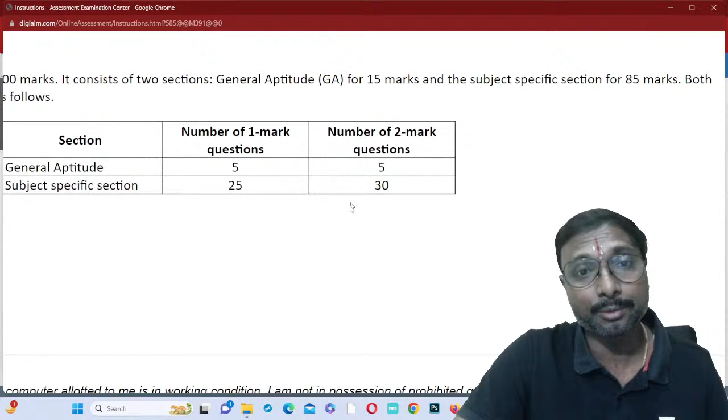If it's not visible, I am zooming it in. General aptitude has 5 one-mark questions and 5 two-mark questions, totaling 15 marks, because 5 into 2 is 10, plus 5 into 1 is 5. So 15 marks total for general aptitude.

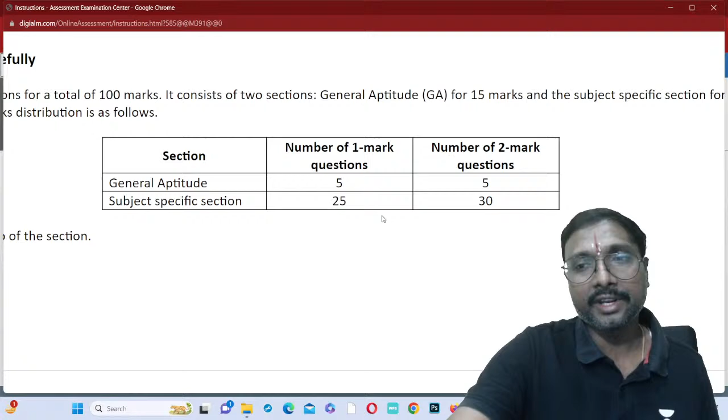Remaining, this is 30 into 2, how much is that? 60. 30 into 2 is 60 marks, plus 25, how much is that? 85. 85 plus 15, how many marks? Total 100 marks, yes or no?

That's covered, so you go for this. This is the splitting. You can declare by clicking on the declaration by the candidate, 'I am ready to begin.' You begin this, and you will be redirected to the test.

If you want to look at the general aptitude, you click on general aptitude. If you want to go to the civil engineering paper, you click on CE civil engineering paper. Got it now? Is it clear, everyone?

So whenever it is a numerical answer type question, here's an example in mathematics: a horizontal curve, radius of the curve obtained as 300 meters, with the design speed as 15 meters per second. This is a transportation question, a geometric design question. If you remember, horizontal curve, horizontal alignment — the radius of curve is 300 meters, design speed is 15 meters per second, with allowable jerk given.

What is the meaning of jerk? Jerk is nothing but the rate of change of centrifugal acceleration. The minimum length of the transition curve is L equals V cube by CR. Do you remember that formula? We have to use it. C or J is nothing but 0.75.

Radius is 300, right? Speed is 15 meters per second, right? So L is equal to V cube by CR. Do you remember that formula? C is given, V is given, R is given.

Directly like that, if you are calculating this, what will you do? V cube by CR, how much will you get? 15 cube divided by 0.75 into... yes, jerk is rate of change of acceleration. So I've calculated it now, if you observe, you will get this value.

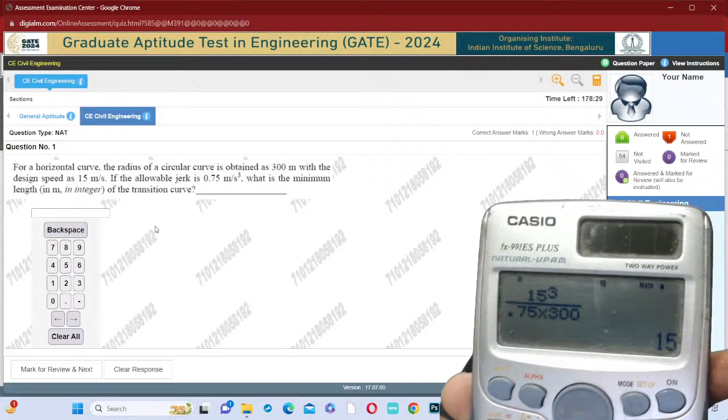This is 15 meters, so what do you do? You enter 15 like this, 1 and 5. You enter like this and press continue. Okay, like that you will move on to the next question.

So here, if you observe at the top right, what happens? You can see the green color showing answered questions — whether you answered correctly or not doesn't matter, but you have answered, so it's green. Not answered questions show thumbs down or red color — that means not answered questions.

How much time is left shows at the top. A virtual calculator is also available at the top if any calculation is needed. We mentioned V cube by CR. V cube is 15 cube, yes? You press the function, 15 cube, then divide it by C.

0.75 we are getting, right? V cube by C divided by R, what is that radius given? 300, right? Like that you try to use it, and how much will you be getting the answer? 15 you are getting here, right everyone?

Is the calculator visible? Whatever operations I am doing, right, 15 you are getting, you enter that 15 there. At the right top you will be finding this calculator, that is why you have to access this calculator.

So this one also, what is it given? That is basic level question only, no? So horizontal curve, is it an in-depth question, or is it a direct formula based question, you can say? That is a direct formula based question given, na? Is it not like that?

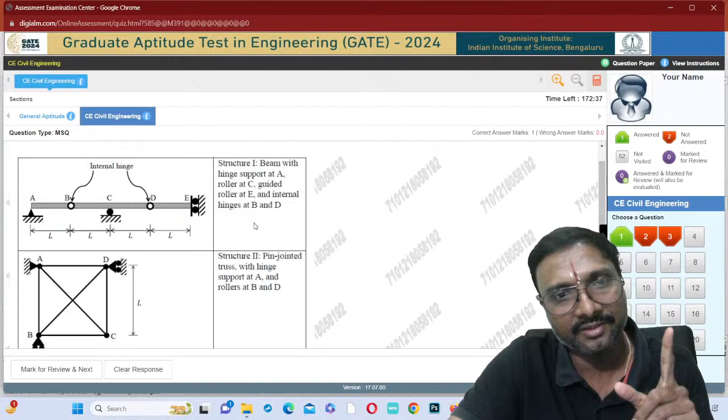Structure 2, what is that you can say? Pin jointed truss with hinge supported at A, B and D. At A, B and D, what is that you can say - hinge supports? Is it true? No. Why? At this B and this D, if you just observe, are those hinge supports or roller supports? Those are roller supports. So that is false.

Structure 3, pin jointed truss with hinge supported at A and roller at C. Hinge supported A and roller at C - that is correct only, no? 3 is correct, right? Here if you just observe, yeah, 3 is correct now.

If you just observe, the question type is MSQ, which means more than one answer can be correct. So structure 1 is correct and structure 3 is correct. So structure 1 you tick it. Is structure 1 unstable or not? Structure 1 is unstable. Is it so? Yes, absolutely it is unstable.

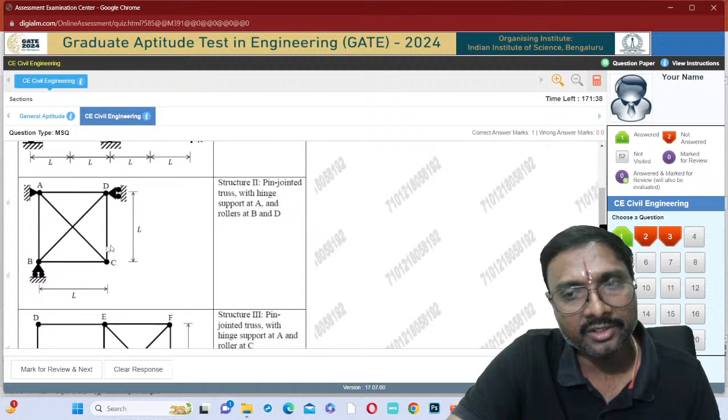Structure 2, what is that you can say? Structure 2 is also unstable. Yes, this entire structure can move in the downward direction - unstable. Structure 3 is also unstable. So all structures are unstable - it is not that all structures are stable. So A, B, C, you have to answer like this.

And what is that you need to go for? Save and go to the next - at the bottom you will be having that save and go to the next button. Click on this, then you will be going on to the next one.

So this is which one - RCC question, is that not so? So structural analysis - previous question it was structural analysis question mark 1, is that not so? That is also structural analysis mark 1, no?

Now this one, sixth question. The cross section of a girder is shown in the figure, not to scale. The section is symmetric about the vertical axis YY. The moment of inertia of the section about the horizontal axis passing through the centroid is - what is it you can say? You are asked to identify the moment of inertia. First we need to find the centroidal location, then apply the parallel axis theorem.

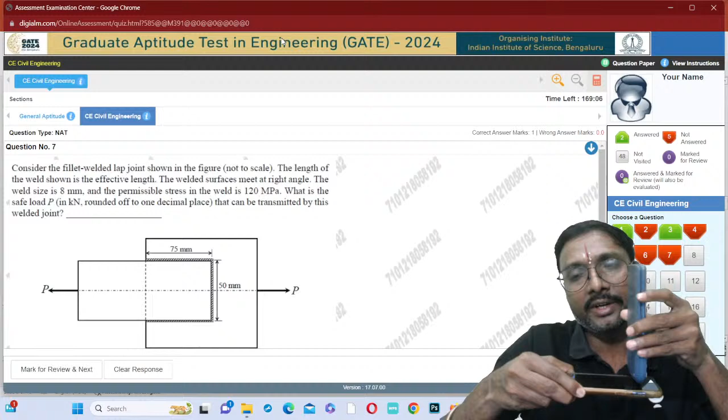So since it is 90, we have to take Ks equal to 0.7. 0.7 times the size of the weld, that we have to take.

If the welded surfaces meet at right angles, the size of the weld is given as 8 millimeters. So throat thickness equals 0.7 times 8. The permissible stress in the weld means, is it working stress method or limit state method?

It is working stress method, you have to be careful. What is the safe load? You can say simply permissible stress into area. What is that area? Area is nothing but the effective length of the weld into the throat thickness. Effective length of weld into throat thickness into permissible stress gives the safe load.

So 120 into 0.7 into 8 into what is the length of weld? 75 plus 75 plus 50. 75 plus 75 is 150, plus 50 is 200.

One second, I will be moving this. So what is that you will be having? The length of this weld is 200. Length of this weld is 200 into what is the effective length?

You can say 0.7, K is 0.7. So 0.7 into the size of the weld, which is given as 8. Into the stress, which is given as 120 MPa.

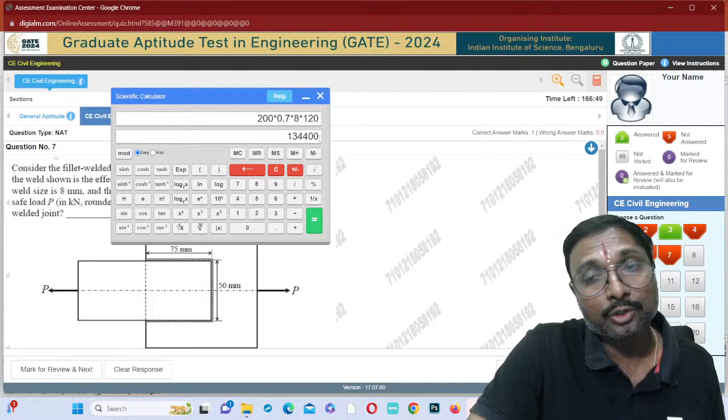0.7, because it's 90 degrees, into 8 as the size, into 120 as the stress. So press equal. What is that you'll be getting? 134,400. So if you want this in kilonewton, how much will it be? 134.4 kilonewton.

134.4, it is given in kilonewton, so you have to enter 134.4 like this. If you are having any doubt, then you mark for review and go for next. If you are not having any doubt, you just go for save and next.

Suppose I wanted to see this again, then you go to the next. Here if you observe, on the right side, answered is shown in green color, that is 2, not answered is 5. Not visited is 48, marked for review in purple color is 0. So if you wanted to check it later, you can mark it for review.

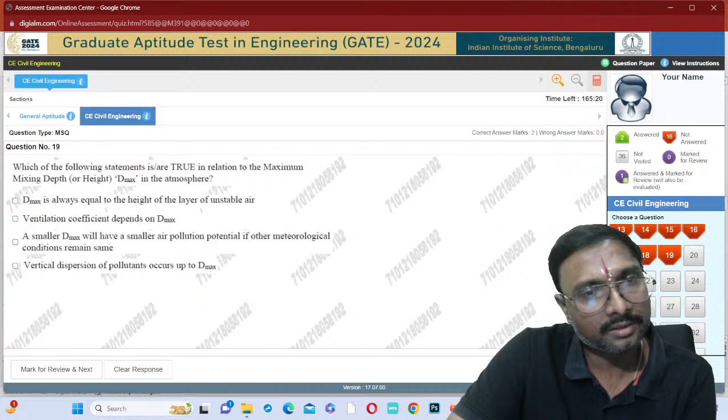This is mathematics only, you can get this eigenvalue question. We are not going into this. This is soil only, we don't go for this. This is also mathematics. This is also soil only. This is also mathematics, these functions, very small questions they are giving actually. This is also a very basic question, we don't go onto this. This is also mathematics only. This is also environmental. This is also fluid, water related. Greenhouse gas, that is also not our subject.

Now if you just observe, this is our one, you can say, right? Tell me which of the following options match. So this is a 2 marks question. Bitumen and transportation, 2 marks question, it is given.

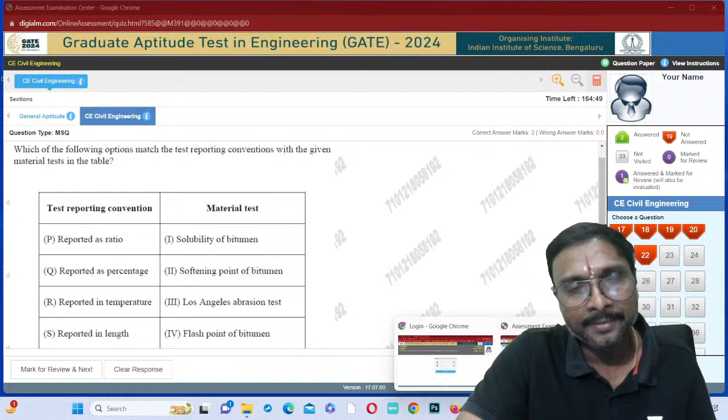Transportation already 1 mark given, and this is your 2 marks question, theory question, right? First question was very basic direct substitution. Second one is theory question only, it is given if you just observe it. Now what is that? Reported as ratio, reported as percentage, reported as temperature, reported in length.

Which one? Solubility of bitumen, softening point of bitumen, Los Angeles abrasion test, flash point of bitumen, ductility of bitumen, specific gravity of bitumen, thin film oven test. Which one you can say? Which one is reported as the ratio? Los Angeles abrasion test, solubility of bitumen, softening point of bitumen.

Softening point of bitumen means temperature. R2 is matching rate, you can say it. R2, how many options are there? First option and this third option only will be there. R2, next, what is it you can say?

Reported in length, right? What is it? Yes, ductility of bitumen, S5, R2, S5. R2 and S5, which option? This option only, you need not check all. Even without checking also, directly you can select it, yes or no, if you are checking to. Then you save and go to the next.

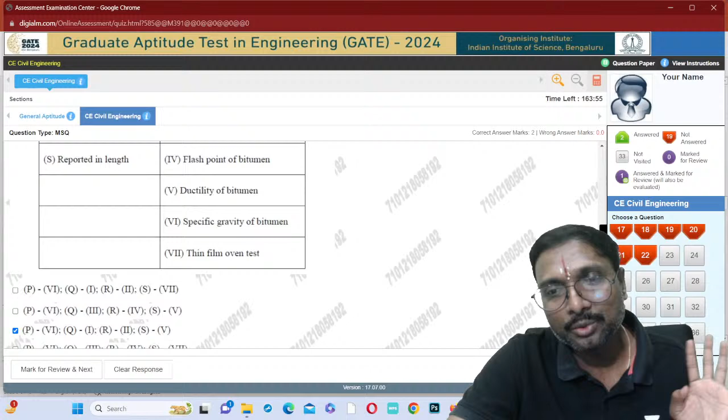Like that. So this is also wastewater, not ours. This is also soil. Yeah, it is RCC, just observe. A singly reinforced, it is a 1 mark question.

Singly reinforced concrete beam of balanced section is made up of M20 concrete. The grade of concrete is given as M20, and Fe415 grade steel is given. Magnitude of the maximum compressive strain in the concrete and the tensile strain in the bar at ultimate state under this flexure is, round off to 4 decimal places.

So it is very basic question. So what is that? In case of this flexure, ultimate state under flexure, right? Under this flexure, what is that? You can say 0.0035, it will take. And what is that? You can say you have to calculate which one.

This is strain, right? Strain in the steel, you have to check it. Do you remember that? How to check it? Very basic question it is. Strain variation is linear in the...

Always, right? Plane sections before bending will remain plane after bending. From that assumption, strain variation you take it as linear. So do you remember that, everyone? That is how you will be getting it from there. Okay, you just go to our classes and you will be getting everything.

So you can select one answer, mostly this one will come. I will just, we are selecting and you go for this. 1 mark, that is RCC given for this 1 mark. RCC is given for which one? This 1 mark, you can say, just for an example.

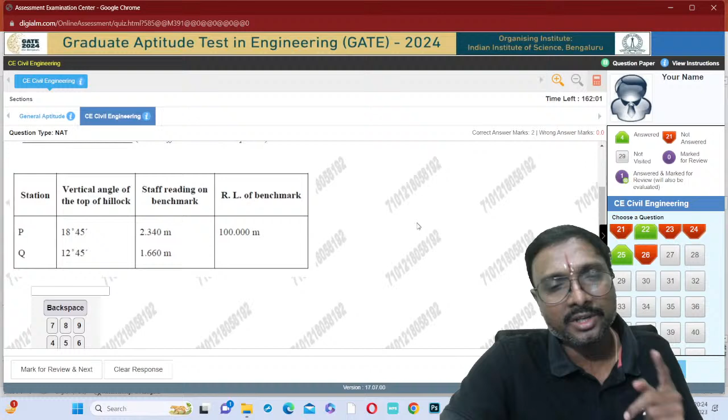Same vertical plane, trigonometric one. So two angles of elevation are only given. So from station 1, station 2, and RL of the top of this hillock, same vertical plane. They are in the same vertical plane means one behind the other, you can say.

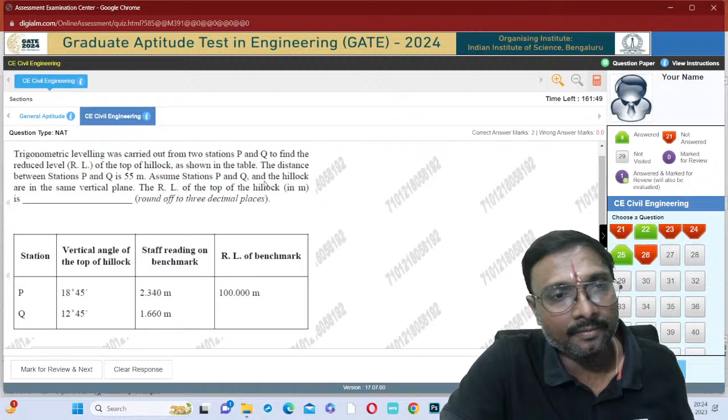You will be having, right? So it will be easy to get this only. So now tell me, station P will be nearby or station Q will be nearby? Which one you can say? Station P you are having higher angle means nearby.

Station Q lesser angle means it is behind. So station P is near to the hill, station Q is away from the hill. Very first case you are having. This is also simple basic question only. There is no twisting in this.

Surveying, how much they have given? 2 marks they have given. This is your survey, they have given which one? This 2 marks plus, you can say. And if you observe the other things, yeah, this is which one?

This is also a geotechnical question only.

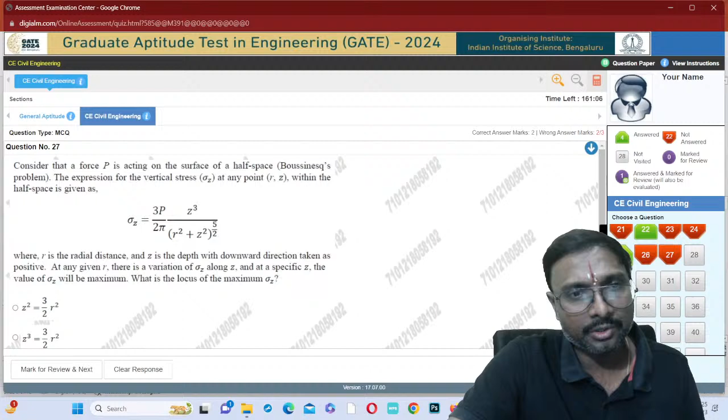This is different, not our subject. This is also not our subject. Yeah, this one, if you just observe, what you can understand from this question is a transportation question, 2 marks.

The plot of speed-density relationship is linear. Speed versus density relationship, vertical axis speed, horizontal axis density. The two roads shown in the figure - capacity of road A is CA, capacity of road B is CB, then what is CA by CB?

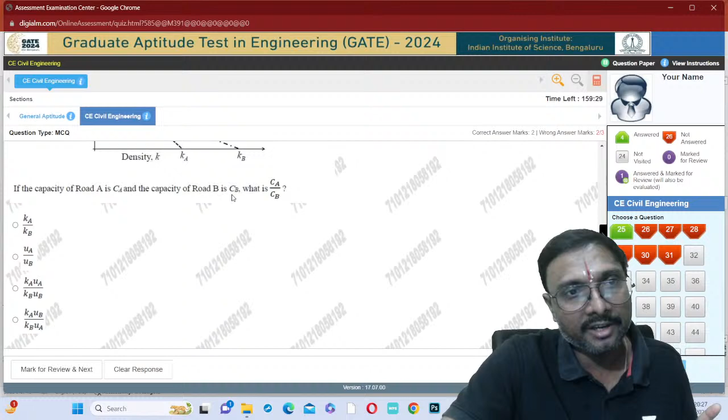CA by CB is nothing but which one? Capacity is nothing but VF by 2, is it or no? That is the capacity of road A, if you just observe - Kj by 2 into jam density of road A, into the free flow speed of road A.

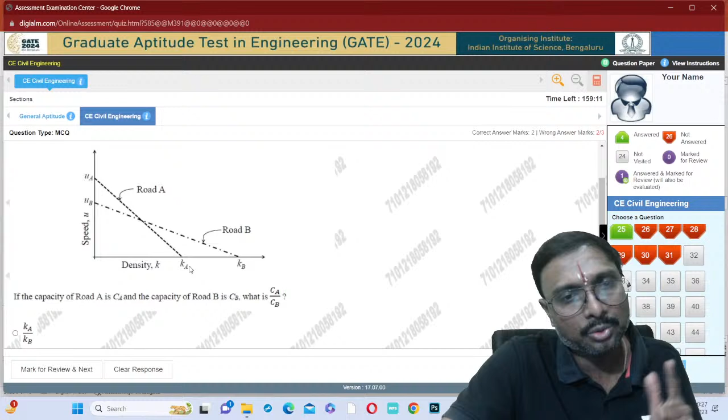So that is Ua into Ka by 2, and this one Ub into Kb by 2. So that gives Ua Ka by Ub Kb. Ua Ka by Ub Kb is which one? This one, option C.

Direct basic question only they have given. So this should not be given for 2 marks actually, this should be given for 1 mark only. So transportation, how many marks? 2 more extra marks, like that you are having now. Got it?

So here plastic section modulus by elastic section modulus we have to go for, you have to be careful. So this is given for 2 marks, steel. This is also a basic question only. Steel, they have given - where is that steel, you can say.

Yeah, steel previously also they have given one question. I did not write this. Steel 2 marks they have given. Previously one more question was there, we missed one question you can say. Where has it gone...

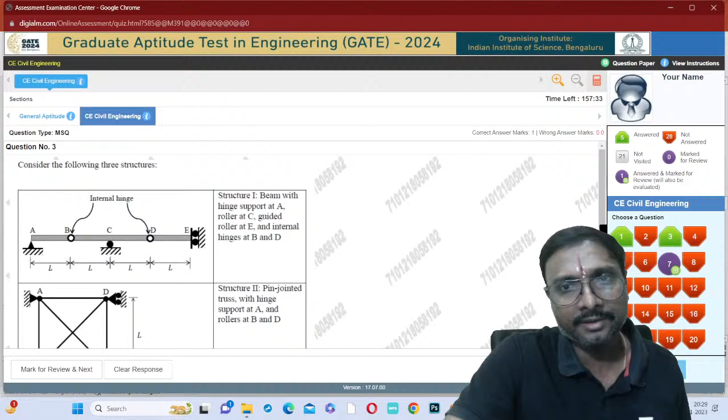So this is transportation, 1 mark given. This is which one? This is structural analysis, 2 marks given. This is also structural analysis, one more mark we have written - 2 plus 1, 3 marks we have written.

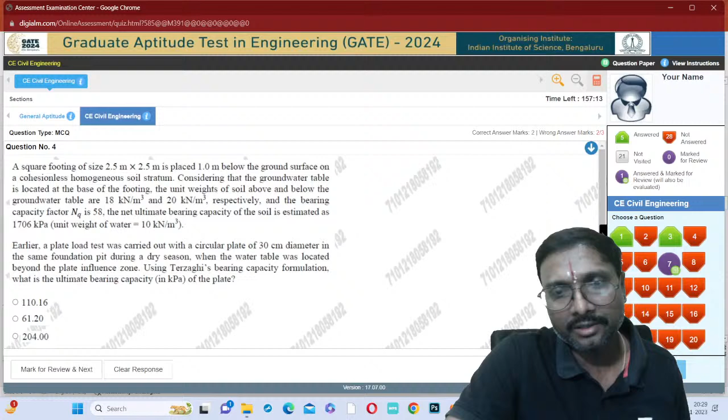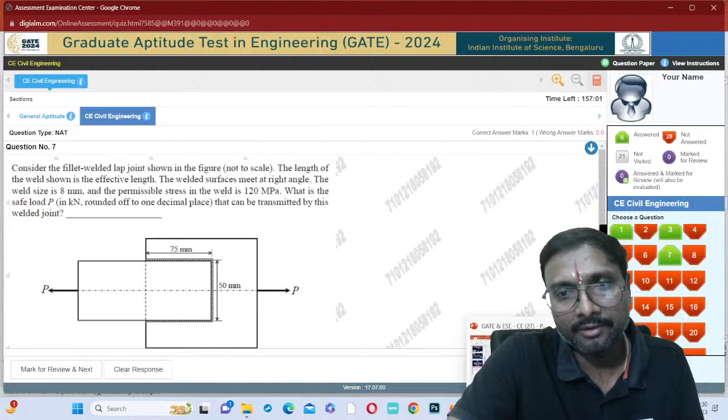Now what is this one? This is not belongs to us. Yeah, this one - engineering mechanics, how many marks? 2 marks given. Yeah, this is steel, 1 mark given, we missed it. Steel 1 mark given - 1 mark plus 2 marks at present.

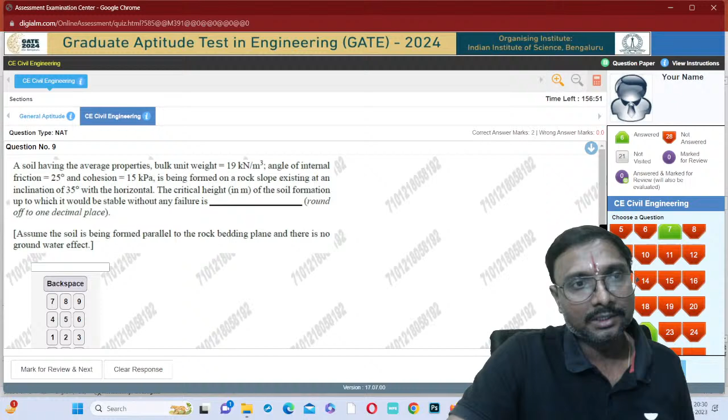Now after that, what can you say this is? This is matrix, soil, maths, soil, maths. Okay, other subject, it is also other subject, not our subject.

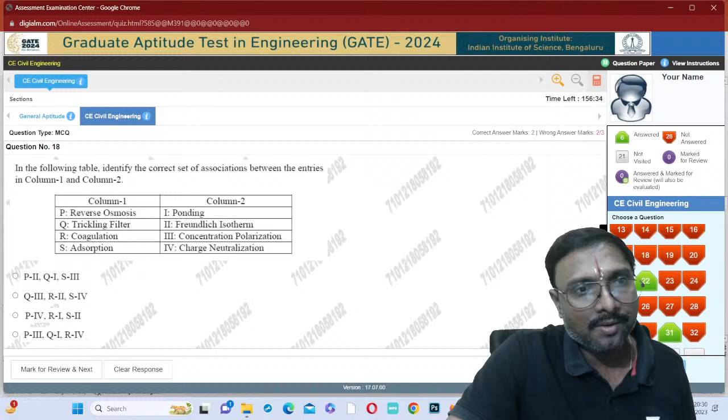Yeah, it is also not our subject. This is also not our subject, right? This is your which one? This 2 marks it is given, so transportation, 2 marks, right? 2 plus 2 we have already written, right?

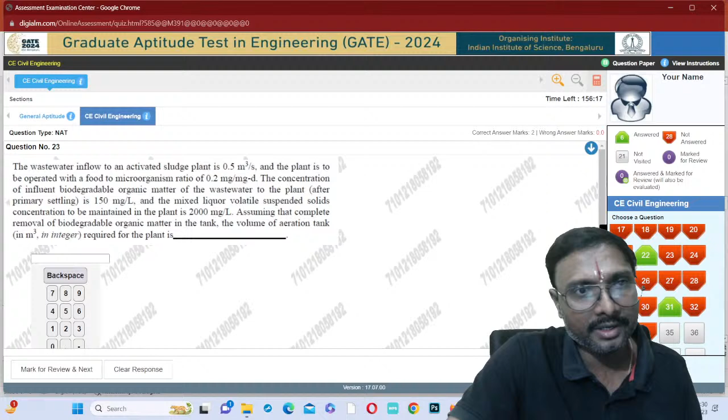So this is question number 23, right? Wastewater, not our subject, right? You can say this is also soil. Yeah, singly reinforced, how many marks? 1 more mark is given. RCC, 1 more mark is given, right? This is singly reinforced, 1 given.

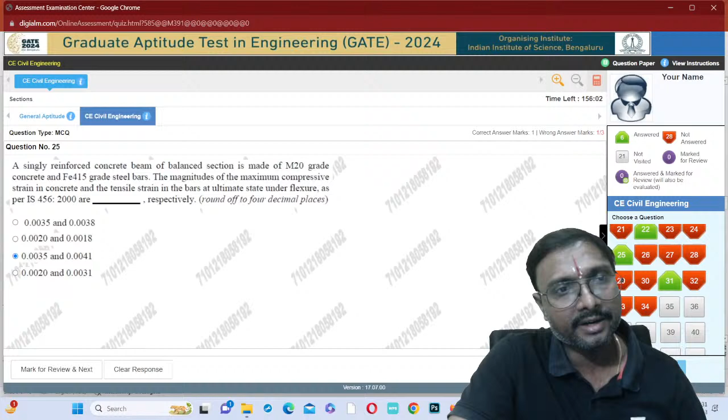So this is also basic now. Steel, if you just observe, working stress method, 1 question given, plastic analysis, 1 question given. So you cannot neglect plastic analysis, all of you, right? This is surveying, 2 marks given, if you just observe.

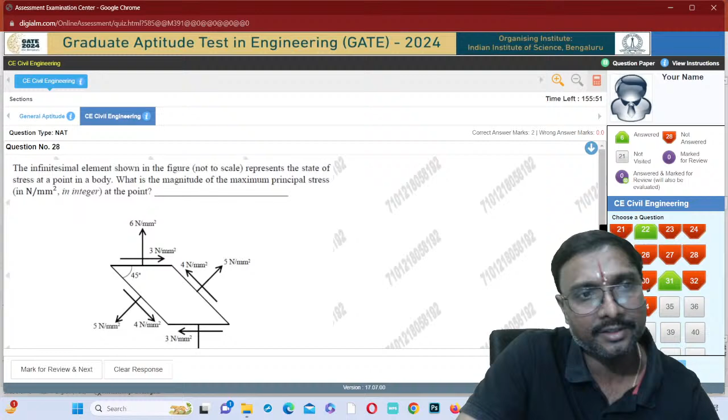After that, what else is given? This is your SOM, 2 marks given. Yeah, SOM 2 marks already we have written, right? SOM 2 marks given. Next, what is this one? You can say, yeah, this is not ours. Yeah, this is again transportation.

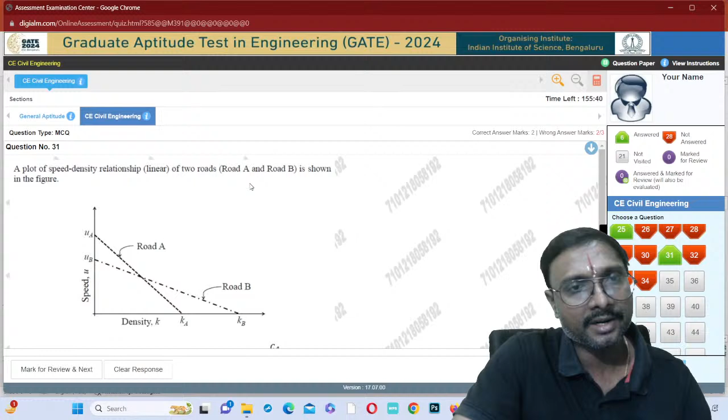At how many marks is it given? It is given at 2 marks. So no, 2 marks it is given, you can say, right? 7 marks till now it is given from transportation, right? Now coming to this, this is pile foundation.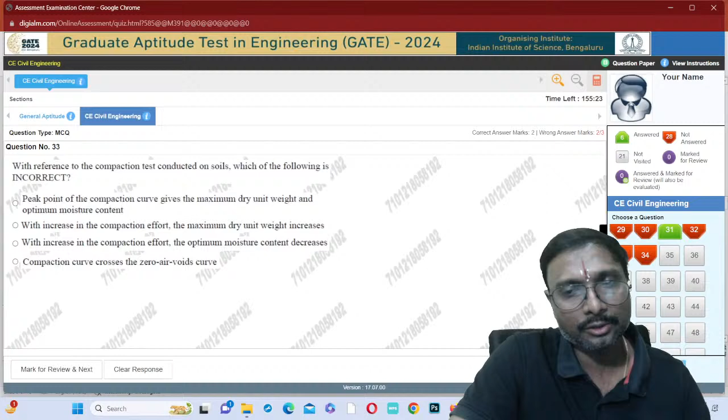Yeah, this is also soil, you can say. This one, consider the axis passing, shape factor. Still 2 marks it is given. Still 2 marks plus 1 mark, right? Now this is also soil, you can say.

Water, right? So this is which one? Drained direct shear test was carried on sandy soil. This is also soil mechanics.

Yeah, if you just observe, this is also aerial photogrammetry. A student is scanning a 10 inch by 10 inch certificate at 600 dots per inch. To convert it to a raster, what is the percentage reduction in the number of pixels of the same certificate if it is scanned at 300 dpi? 600 dpi, it is 10 by 10, so then for 300 dpi, what do you have to go for? You can answer this question. This kind of question we have solved similarly, we have solved already, if you just observe, right?

Now this is given for 1 mark. Survey, it is given for which one? This 1 mark, you can see. Numerical, but this is also a direct basic question only, right? It's not that much of a depth question.

This one, probabilities of occurrence, that is mathematics. Vertical trench, soil. Yeah, doubly reinforced, single reinforced given one, doubly reinforced section, and this is 2 marks if you just observe, with an option of using Fe 250 plain bars or Fe 500 deformed bars. Either mild steel bars or HYSD bars you have to use in the compression zone. So doubly reinforced means tensile reinforcement will be there, compression reinforcement will be there.

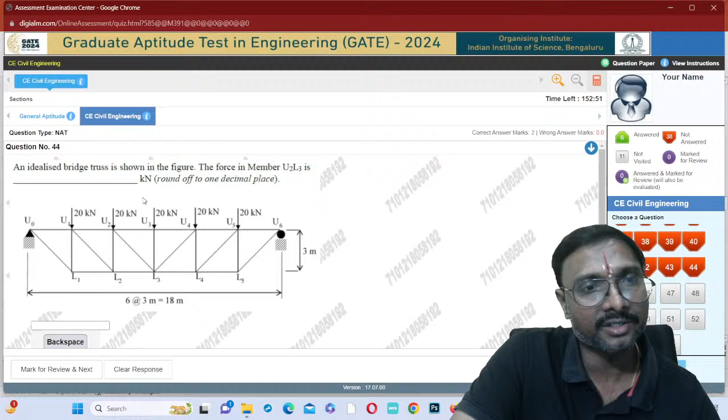So now this is also structural analysis again given, right? Force in the member U2L3, right? So which one is U2L3? U2L3 member you have to go for, right? Method of sections we have to go for, right? Method of sections we have to go for trusses, right? This is a truss question, no? So 2 marks it is given.

Method of sections, you cut the section and you apply this, right? So structural analysis, how much is it given, right? 2 marks again it is given, right? You have to be careful.

So this is also a mathematics question only, right? Yeah, which one is this? This is a strength of materials question.

Consider the beam shown in the figure, not to scale, on a hinge support at A, roller supported at B. The beam has constant flexural rigidity EI, subjected to external moments. These two moments are applied at 1/3 as shown in the figure. Which of the following statements is true? Support reactions, shear force, bending moment, right?

So SFD, BMD, right? Principal stresses, they have given one question. Now SFD, BMD also they have given for 2 marks. So if you just observe, plus 2 more marks you can get, okay?

Now you can identify: sum of the moments about A equal to 0, you get the reaction at B. Sum of the vertical forces equal to 0, you get the reaction at A, right? Then you draw the SFD and BMD, fatafat danadan ho jayega, right?

Okay, this is also mathematics actually. So trapezoidal rule actually, this is given as which one? A function f of x is smooth and convex shaped between the intervals xl and xu.

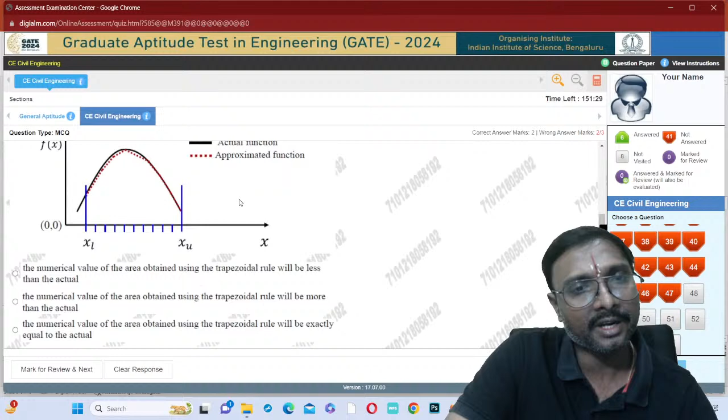Shown in the figure, the function is observed at an odd number of regularly spaced points. The area under the function is computed numerically, and the value obtained using the trapezoidal rule will be more than the actual, or the trapezoidal rule will be exactly the actual, and so on, right?

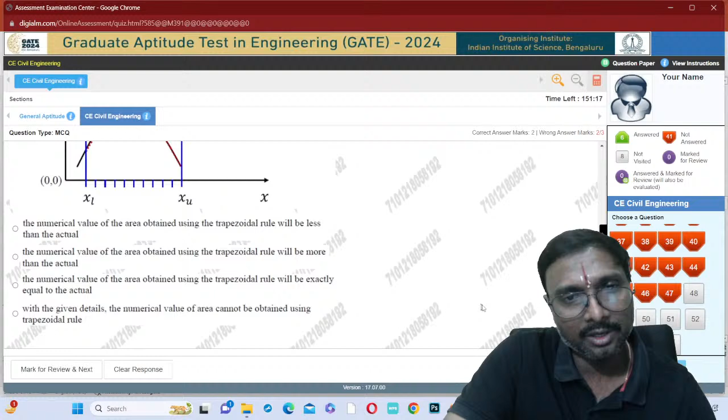So trapezoidal rule, Simpson's rule, you can say you can add it in surveying, yes or no? Can you add it in surveying or not, everyone? Or you can add it in mathematics also, no problem. It's 2 marks, not 1 mark, you can say. In surveying, it's 2 marks.

So now, yeah, unit hydrograph question. Mix design, right? This is mix design concrete. Increase in the water cement ratio, right? That is concrete technology or building materials topic, you can say.

This is which one? Again, strength of materials. A hanger is made up of 2 bars of different sizes. Each bar has a square cross section. The hanger is loaded by 3 point loads in the mid vertical plane as shown in the figure. Ignore the self weight of this hanger. What is the maximum tensile stress?

So that means in the top bar you have to calculate the stress, in the bottom bar you have to calculate the stress, right? So what do you need to do before that? First you calculate the force in the top bar, force in the bottom bar by considering equilibrium of forces, right? So this is also basic one only, no?

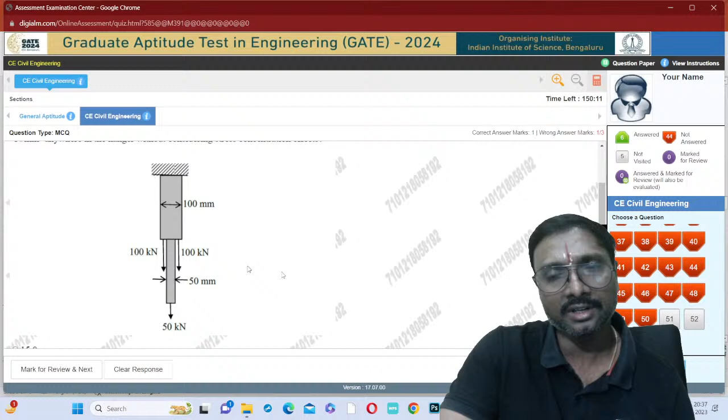First chapter, you can say, simple stresses and strains, we have done all this. Neglecting the self weight, you only consider the external loads, right? This is also given for 1 mark, na? Very basic question, right? Strength of materials, it is given for 1 mark, you can say.

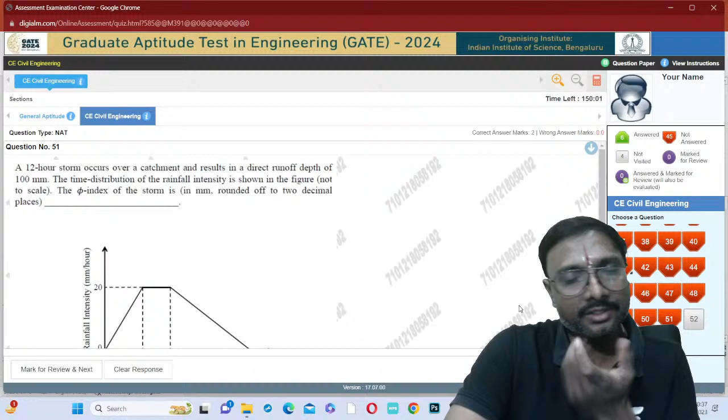So next question, if you just observe, this is your storm hydrograph, hydraulic jump, fluid mechanics.

Yeah, here vertical curves, if you just observe, right? Yeah, today only somebody was asking, sir, shall I neglect vertical curves or not for studying? Yeah, somebody is asking in the message.

This is also which one? Just the formation of this one, na? G1, G2 are two slopes of the approach and departure. One is the approaching slope, one is the departure slope, right? Given G1 magnitude is lesser than G2, and G1 is not equal to G2, and not equal to 0.

Statement 1: plus G1 followed by plus G2, right? G2 will be which one? This higher value, na? So lesser upward gradient followed by higher upward gradient. Is it forming a summit curve only, or no?

Yes, that is forming a sag vertical curve, or wrong? That is sag vertical curve, which is nothing but your valley curve. That is wrong, na?

Second one: minus G1, so this is downward, followed by minus G2, right? G2 will be higher. It is forming which one? This is sag vertical curve.

That is also wrong. Statement 3: plus G1 followed by minus G2. This is resulting in a crest vertical curve. Yes, summit curve, crest vertical curve. Only statement 3 is correct, right?

Right, you have to go for it. You have to select which option among the following is true. You have to select the correct answer and select the answer, right?

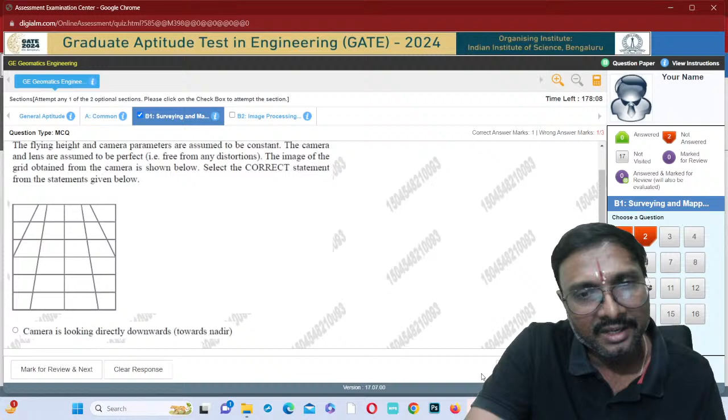So what is it you can say based on this diagram? Camera is exactly looking like this, or it is looking like this, a little inclined. At this place, so little upward inclined, so what will happen, more area is covered, you can say. So this you have to identify.

So that is very, very basic, first chapter question only. Survey of India is publishing which maps, right? Very basic questions only you are getting, all. So wrong answer you will be getting 0 marks, right?

So in this B1 and B2, what is the advantage? Even if you are selecting the wrong answer, there is no negative marking. Only for this general aptitude and common, negative marking is there, but for these two, negative marking is not there. So you have to be very, very careful for these 19 questions.

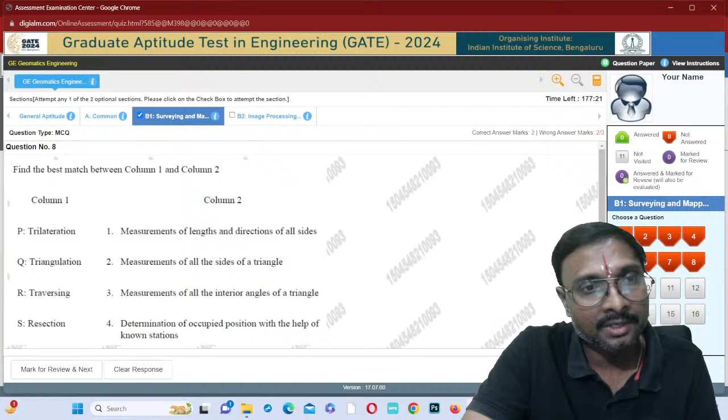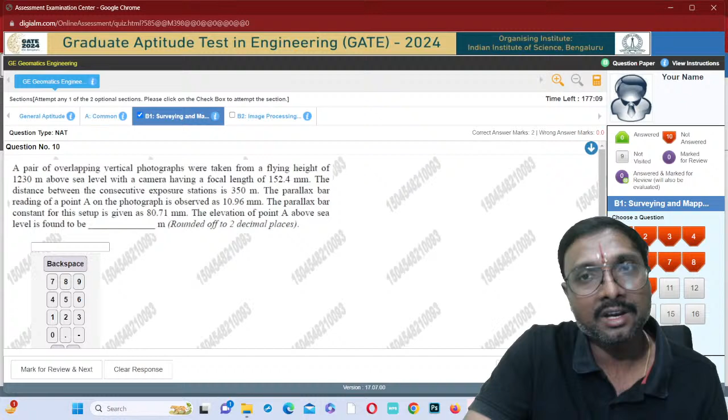So this is trilateration, triangulation, traversing, these are all we have discussed now. Triangulation survey, aerial photogrammetry, GIS, GPS, first chapter basics, compass. All surveying they are giving, right? This is also aerial photogrammetry. So they are covering more aerial photogrammetry. Maps, first chapter basic maps, you can say, like that. So this is a traversing question.

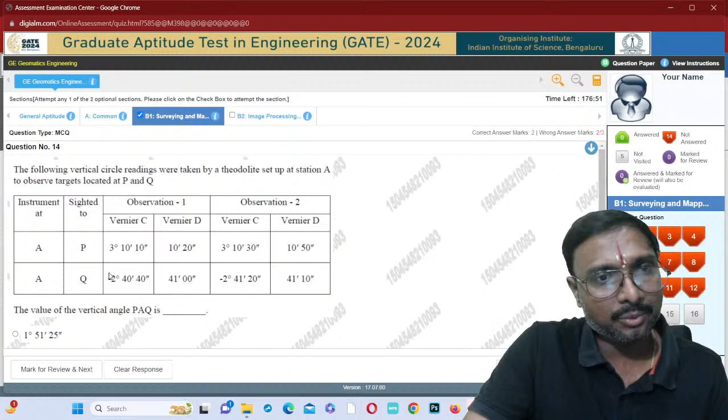Relief displacement, again it is aerial photogrammetry. So like that, what is it you can say? Vernier C, vernier D, theodolite you can say. So this is also which one? This ellipsoid and basic questions, you can say, first chapter questions, right? Like that, this is also a leveling question.

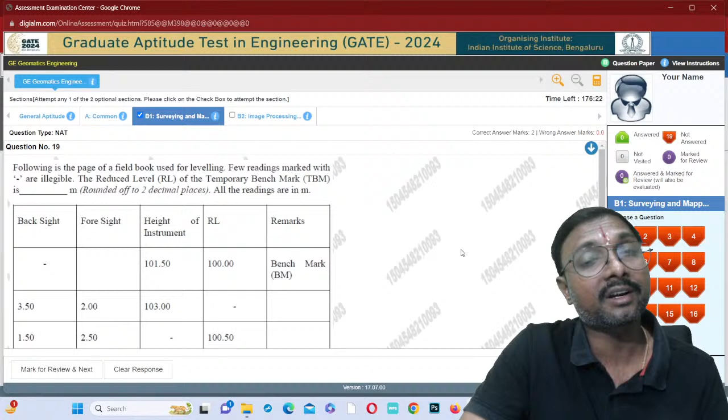So in the surveying they are covering more surveying, no? Yes or no? In the surveying they are covering surveying or not? Yes, absolutely they are covering surveying, right? This is tacheometer. So in the GATE civil engineering they are not covering all surveying topics, but here if you just observe, they are covering all surveying topics without missing anything, right?

This is again leveling. So now you have to go for. So like that you'll be having, right? So this is how you'll be having the questions, just generally in the civil engineering.

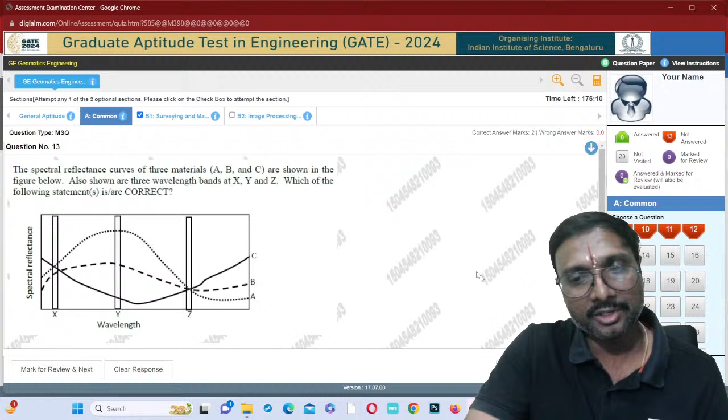So from the mock test, what you can understand, it is not compulsory, but there is a possibility that structures weightage may be higher. Surveying they may give higher questions, structures also they may be giving higher questions, right? You have to be careful, very, very careful, you guys, right?

Like that. So first you attempt this. Again I am explaining, right, where you have to go for. This is a website, gate2024.iisc.ac.in, you go for. Then you will be getting this website. Go to the top.

So once you are on this website, you get gate papers, mock test links, and also you can go to the down notifications. Gate WhatsApp channel is there and all these are there. If you observe, notifications also will be there - GATE mock test notification, right? Just wait until that comes. Mock test links are live now, available now. You just click on this - either go from gate papers mock test links, or from the bottom notifications. Then select, click on this one or that one, enter your details, sign in.

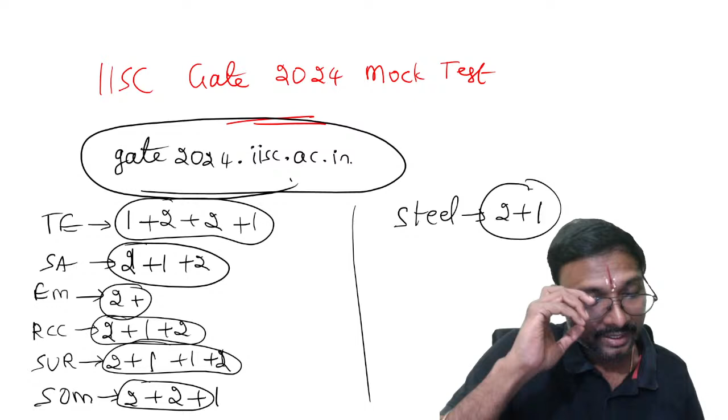Don't miss this everyone. Now tell me, anyone having any doubt? And where can you find the calculator? If you observe, you can find the calculator at the top.

Top right corner - let me go further. See why it was showing an error page? Once you close this, it will show an error and your test will be over. You cannot attempt or submit after that.

You have to be very careful. Once the test is opened, don't close this test page, whatever the situation is. You will not be accepted otherwise - that's a mistake, and if you do it, the test will be over.

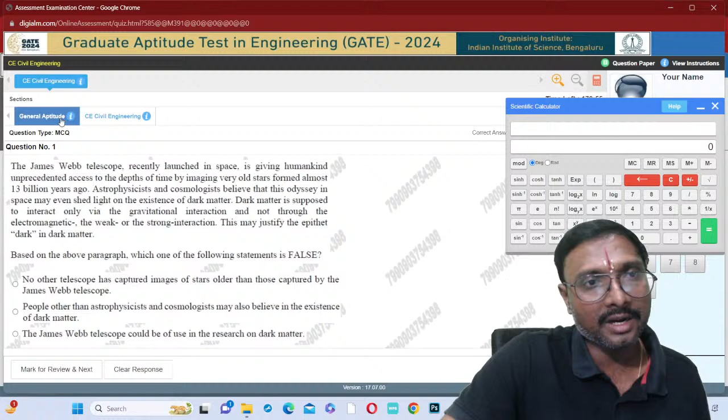The calculator will be at the top right. So for the general aptitude or civil engineering section, whichever you want, you can go for that first. If you want to submit - suppose you select an answer and click mark for review and next, then the first question marked for review will turn purple.

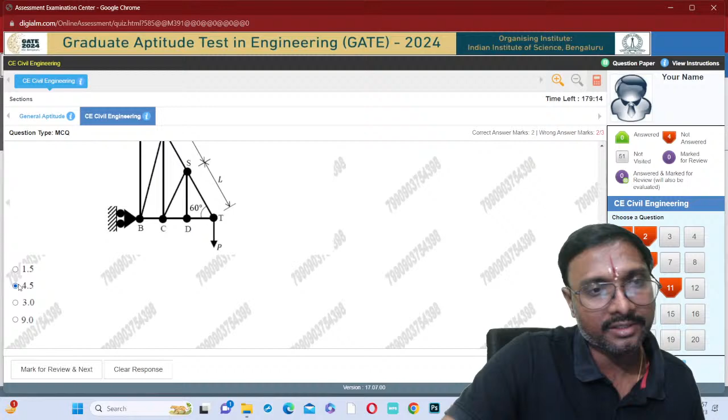So whenever you are attempting, what you need to do first is go for the simple, 1 mark questions. Then after that, go for the other 2 mark, more difficult questions.

Here if you observe the functions - degree and radians are available, so you can substitute sine, cosine and all these functions in degrees and radians. The value of E is given, you can say 2.718, and Pi value is also given. Factorials are given too - factorial of, say, 3.14.

If you observe, suppose I want 8 factorial - factorial of 8 is 40320. Many people think of mathematical factorials like nCr, meaning n factorial divided by r factorial into (n minus r) factorial. So this kind of factorial question makes people think about how to solve it, but here it's directly given.

Based on these functions, you should try to make your preparation, all of you. Only the mouse will be working, nothing else. The functions available are hyperbolic and hyperbolic inverse, hyperbolic trigonometry, normal trigonometry, inverse trigonometry, hyperbolic inverse trigonometry, Pi, E, and factorial.

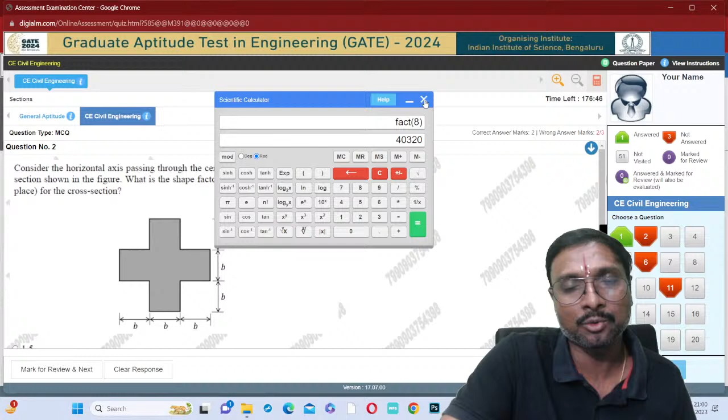If you observe the question level, these are basic level questions only - only one or two are medium type. Since basic level questions are given, you have to be very careful, because everybody can attempt the exam and solve many questions, so there will be more competition. You cannot neglect any subjects.